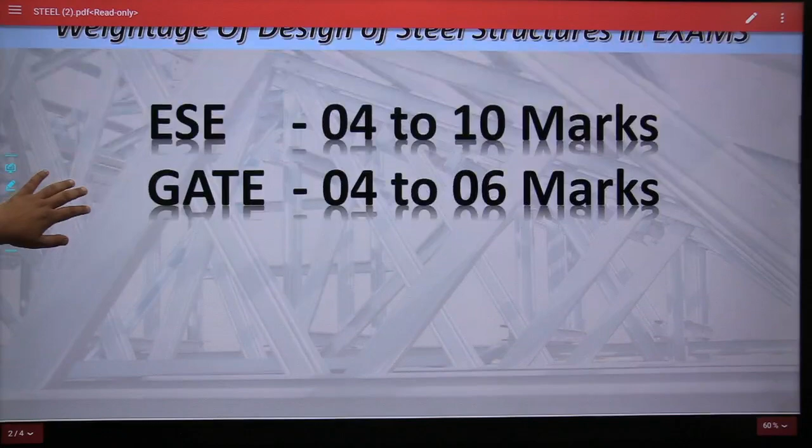Students, if we talk about the weightage of steel structures - on average, in previous year examinations, 4 to 10 marks questions were asked from steel structures in ESE, that is Engineering Services Examination, whereas in GATE examination, on average 4 to 6 marks questions were asked from this subject. So I ensure you that in your upcoming examinations you will see 2 to 3 marks questions definitely from steel structures.

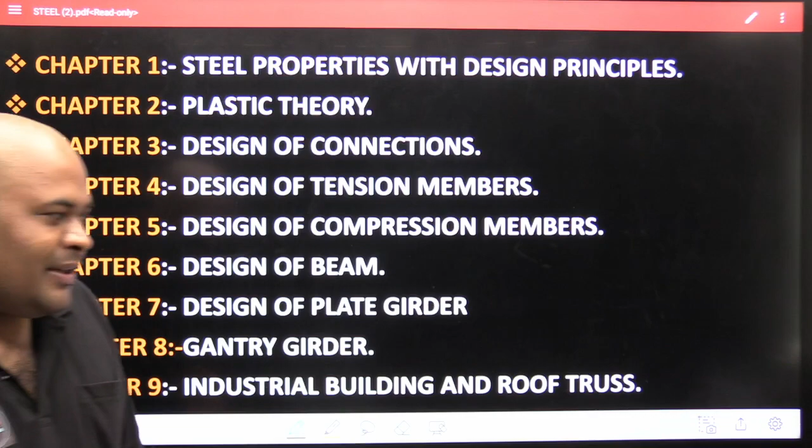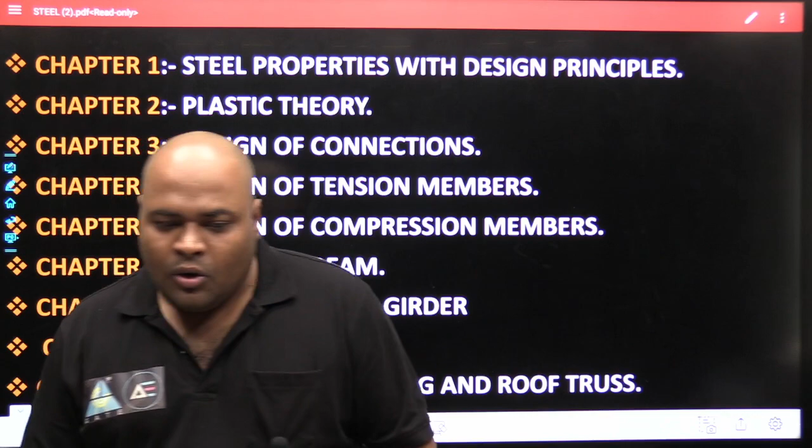Now it's time to understand, to see, to feel what chapters we are going to discuss in this subject. So students, I have divided this subject into 9 important chapters, as you see here. The first one is steel properties and design principles. The second is plastic theory, then connections, then tension members, then compression, then beams, then plate girders, then gantry girders, and in last, industrial buildings and roof trusses. These are the 9 chapters which we are going to discuss in these courses.

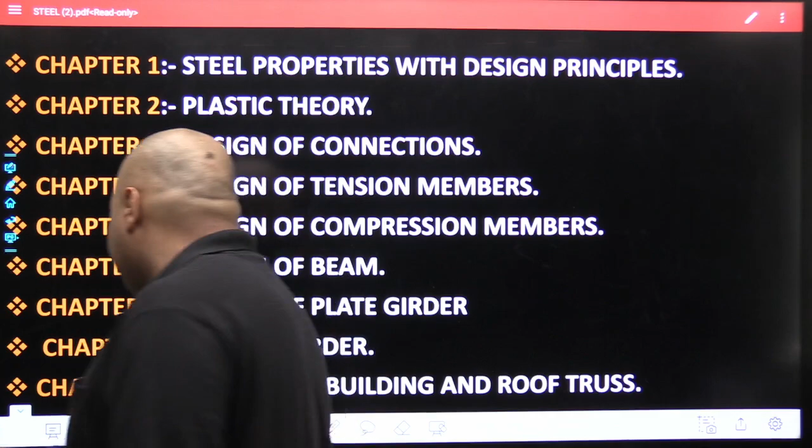Now let's see the subtopics of these chapters, what we are going to discuss in each individual chapter. Let's see that. If you talk about the first chapter, that is basics - steel properties and design principles. This is your first chapter, students.

In this chapter, first of all, we will discuss the basics of mechanics and strength of material. As you know, steel structures is a subject of designing, and the concepts of SOM and mechanics will be used in the further topics of this subject. So a good knowledge of mechanics and SOM is very much essential for the upcoming chapters of steel structures. So what I have done, I have taken 2 or 3 classes in which we will discuss only the basic concepts of strength of material and engineering mechanics, so that you become comfortable with these concepts.

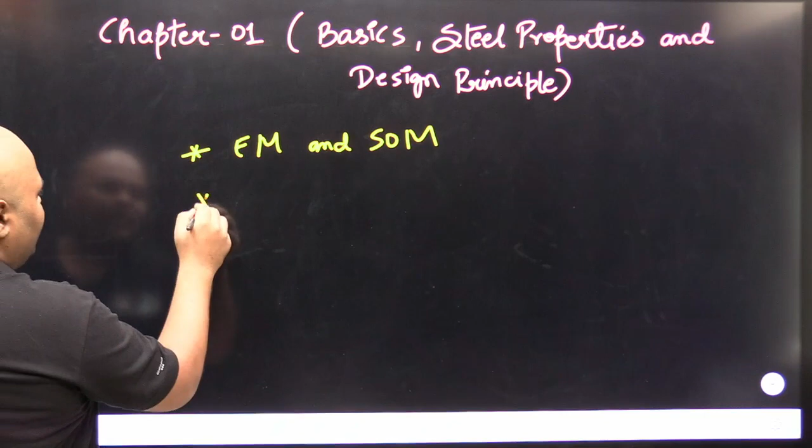So in the basics, we will deal with the concepts of engineering mechanics and strength of material. After that, students, we will discuss the structural steel properties, like what?

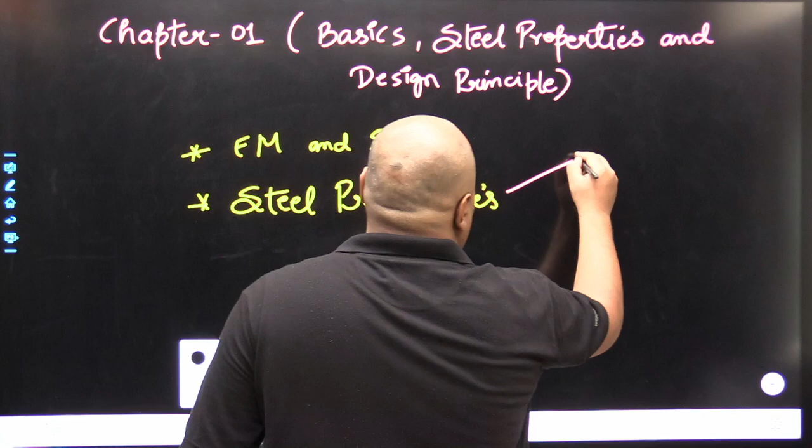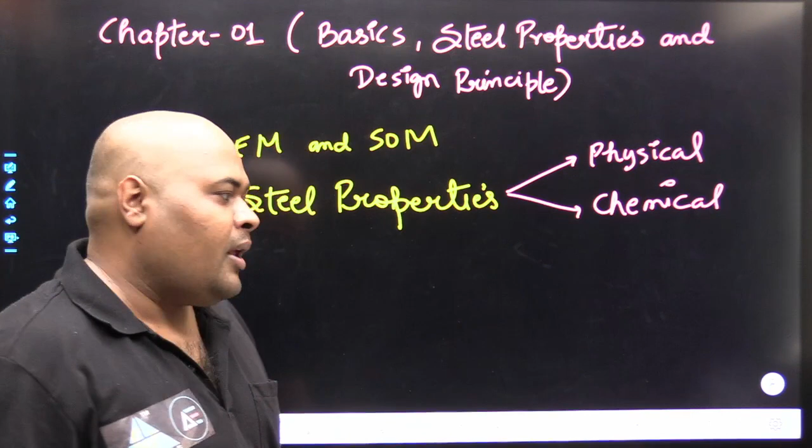Like physical properties of steel, chemical properties of steel - what is the chemical composition of good steel - and at last, the mechanical properties of steel. So in steel properties, we will discuss these 3 properties: physical, chemical and mechanical properties of steel sections.

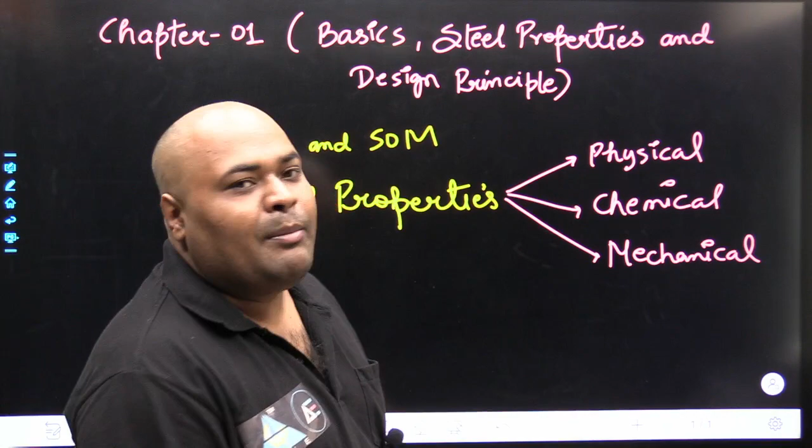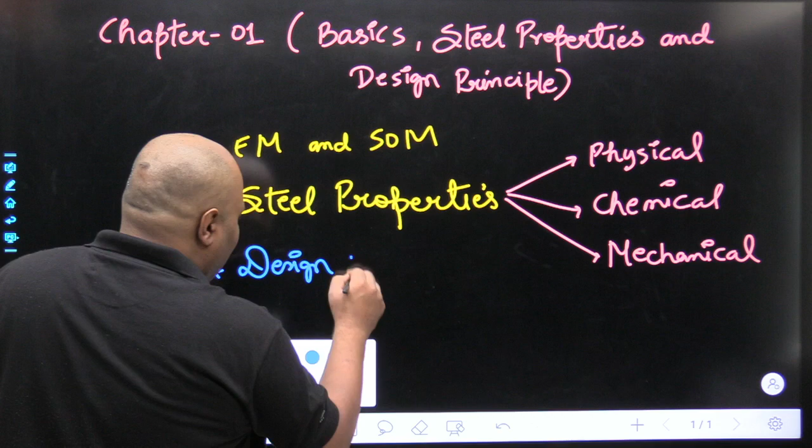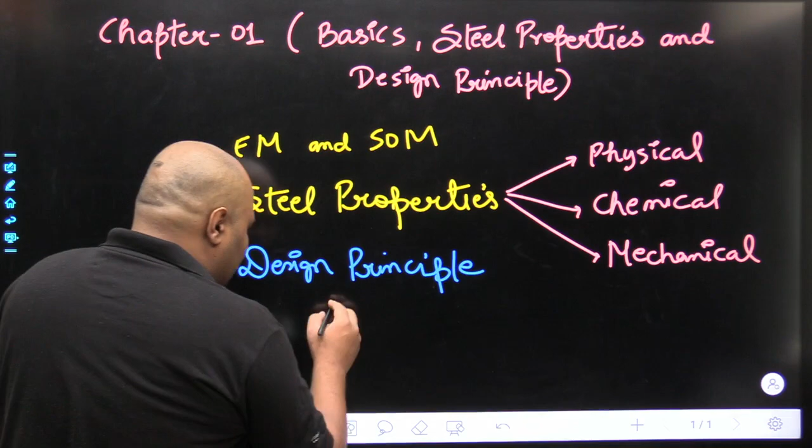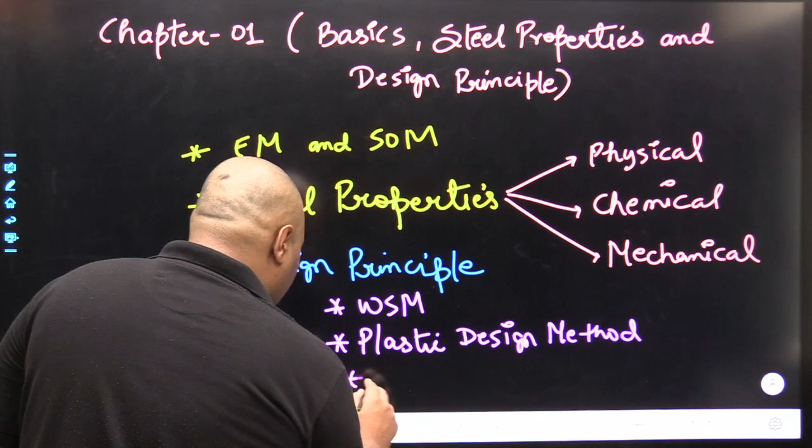Okay guys, and at the last, and very important, the design principles. We will discuss these in the last of chapter first. In design principle, students, we will discuss the 3 basic methods of steel structures: WSM, working stress method, the plastic design method, and at the last, your limit state method.

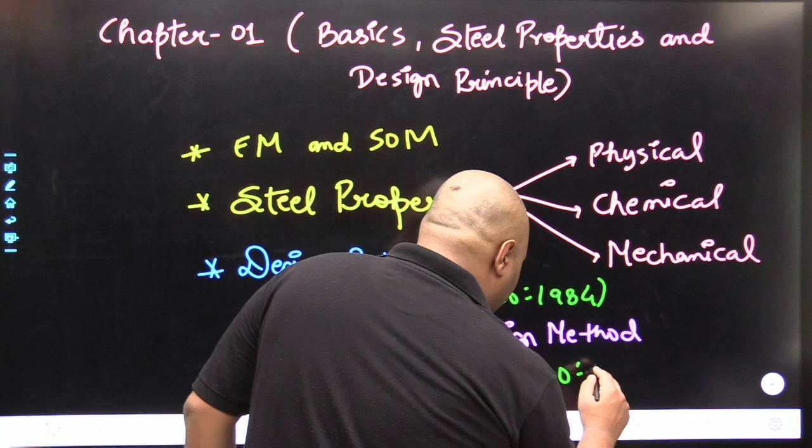Students, if you talk about the working stress method, then you need to follow IS 800 1984, and if you talk about the limit state method, then you need to follow IS 800 2007. These are the Indian standard codes for working stress method and limit state method. So by the use of these three methods, we will design the steel sections.

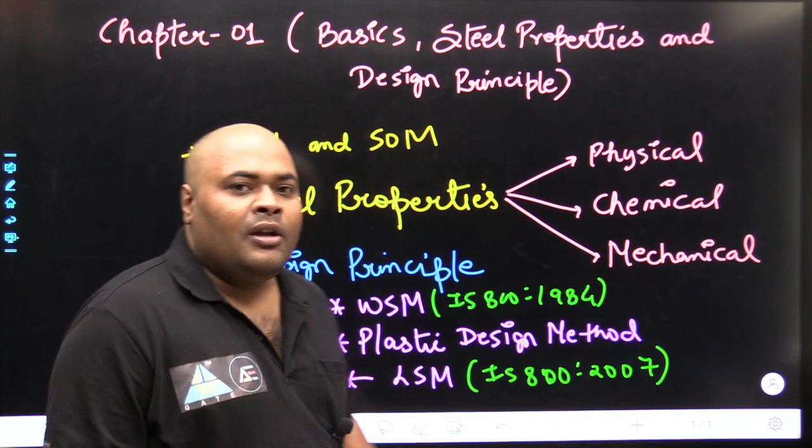Okay, so this is the introduction part of chapter 1. After finishing chapter 1, we will discuss chapter 2, that is your very important chapter named as plastic theory. Students, in strength of material or in engineering mechanics, you have done your analysis up to elastic limit only.

Up to elastic limit only. But in plastic theory, we will design the structure, we will use the property of steel sections after the elastic limit, up to the plastic point. So this chapter will tell you how the structure behaves after elastic limit.

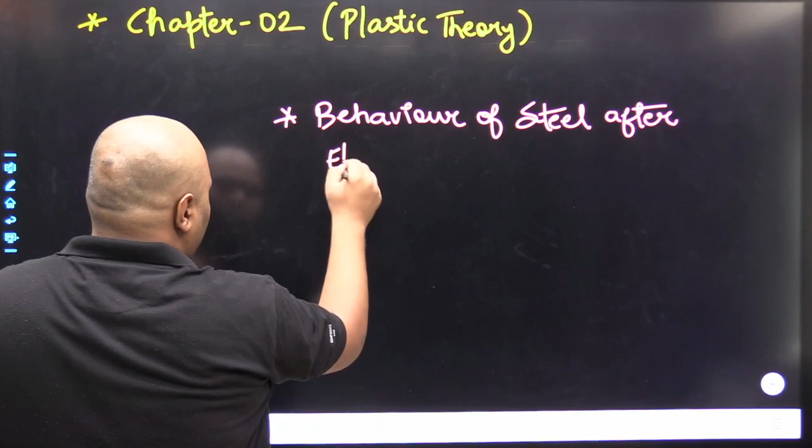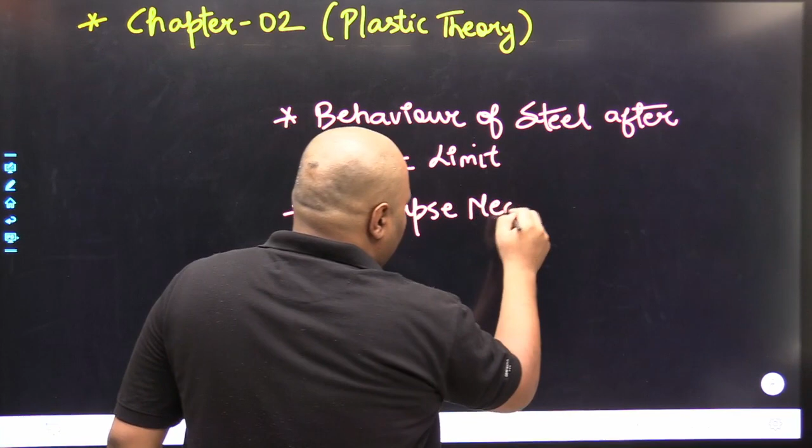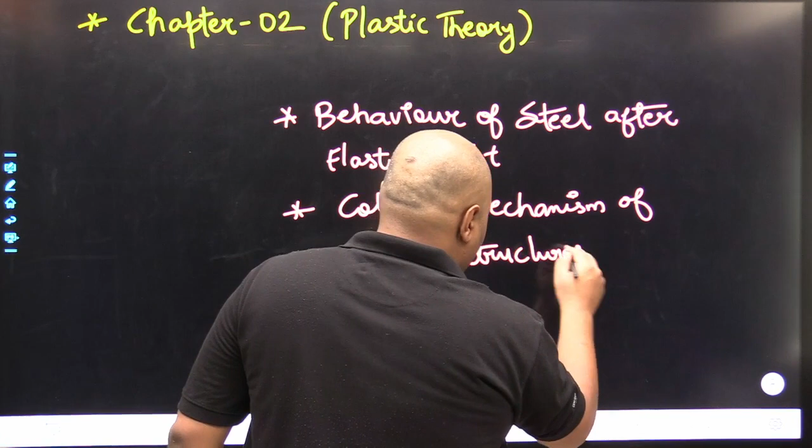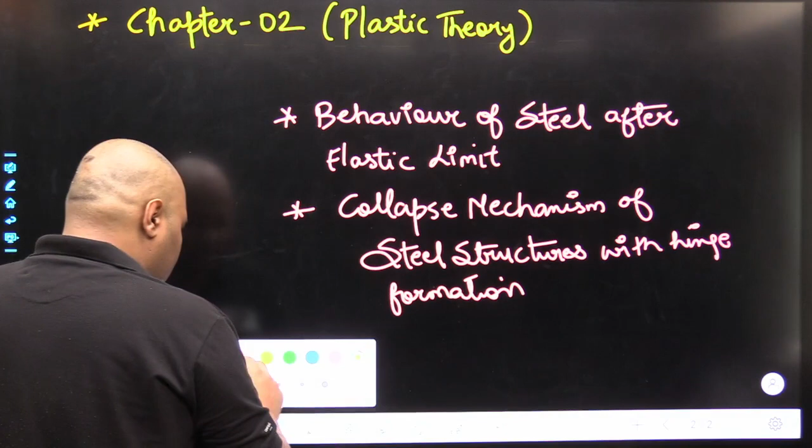So in this chapter we will discuss the behavior of steel after elastic limit. We will also discuss the collapse mechanism of steel structures with hinge formation, and of course we will discuss a very important factor, that is your shape factor.

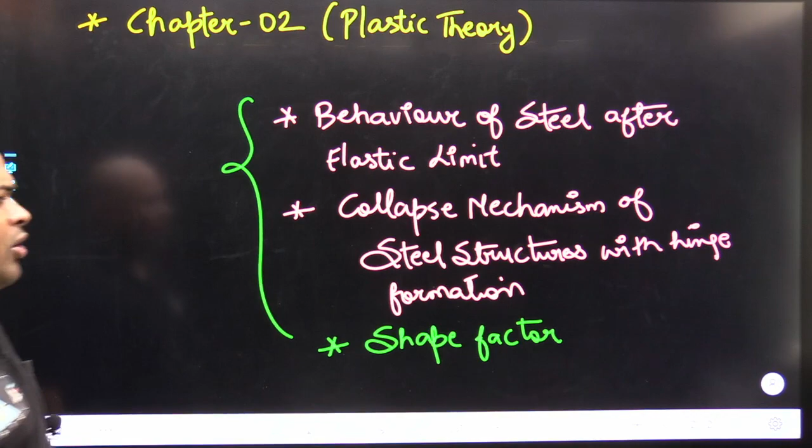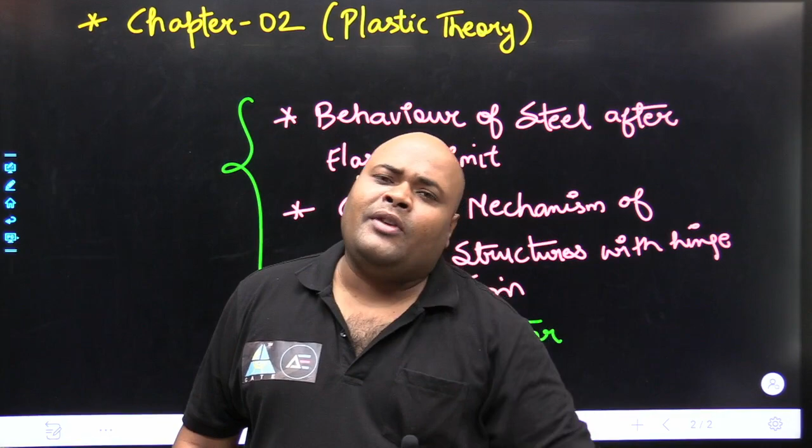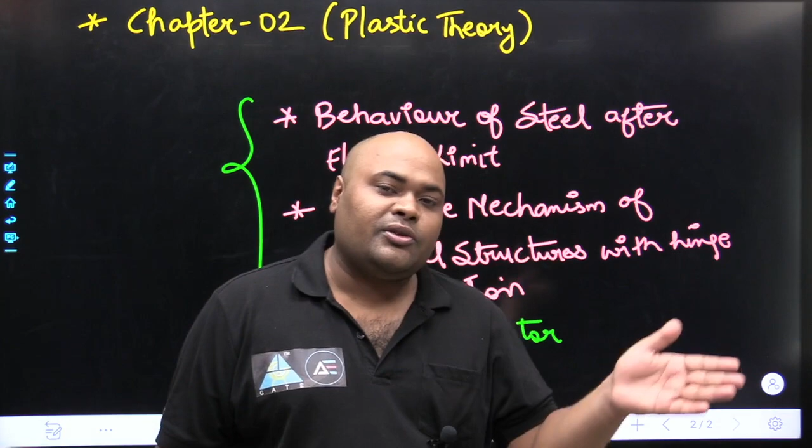So basically these are the three basic or important points which we will cover in chapter 2. Besides this, many topics are there. So in chapter 2, basically what we will do, we will see the behavior of steel sections after elastic limit, how the steel sections behave after elastic limit in plastic zone. When a steel section enters the plastic zone, then how it behaves - we will see these concepts in chapter 2, that is plastic theory.

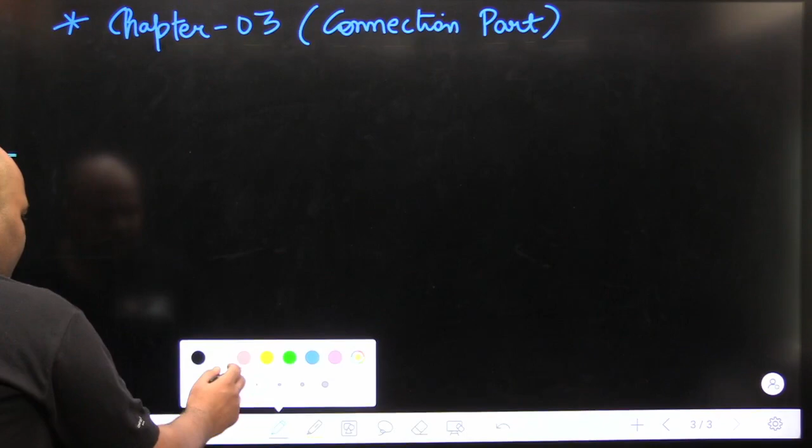After discussing chapter 2, that is your plastic theory, we will discuss the very important chapter of steel structures, that is chapter number 3, that is your connection part. Students, after discussing all these chapters, I will tell you the importance of individual chapters as per ESE or GATE point of view, so please watch the video up to the last. So in chapter 3, we will discuss the connection part.

What is connection? First of all, I want to tell you what is connection. So see students, in my hand, you are able to see that, I hope so. Basically, let us assume these two plates - I am not going to say this is a gusset plate because you are not aware of this subject - so let us assume these two plates are connected like this.

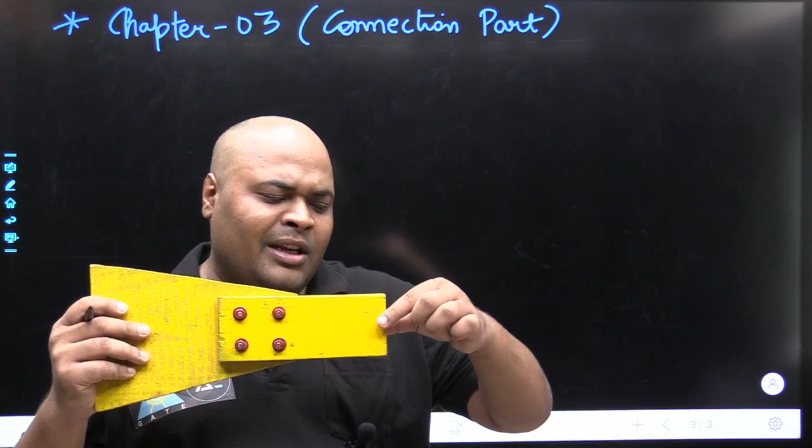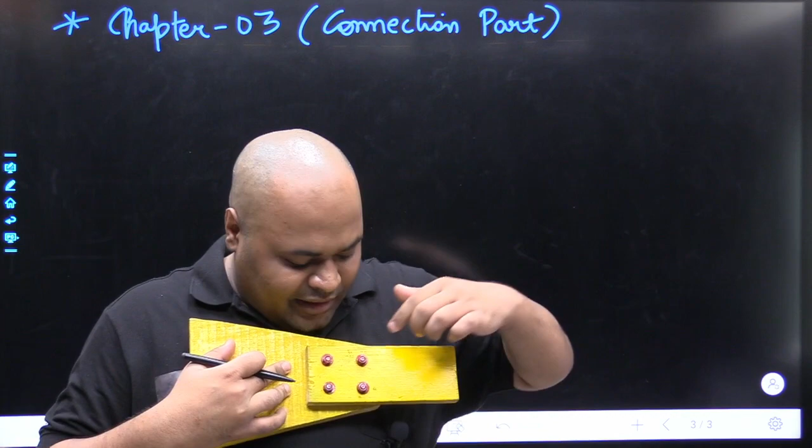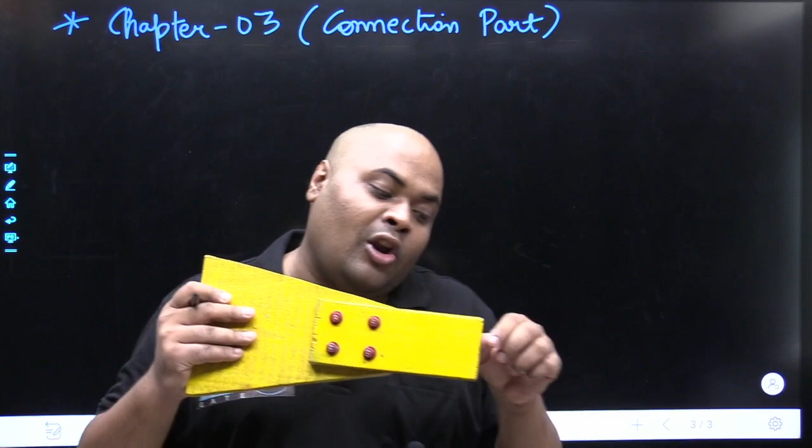And if I am applying a force, an axial force in this direction to this plate, then what you are seeing here, these two plates are connected with these 4 bolts. So the force I am applying here is resisted by these 4 bolts. Got it guys? So this is the connection between these two plates. These two plates are connected by the 4 bolts, and the load I am applying here is resisted by these 4 bolts. So in the whole connection part, we are going to discuss only the strength of connection.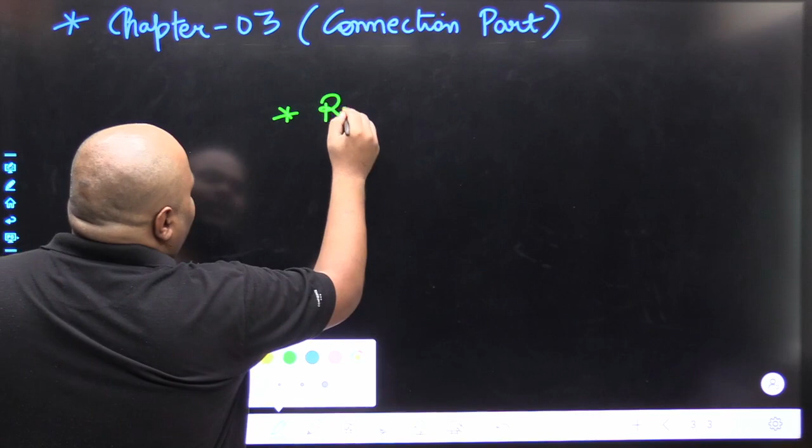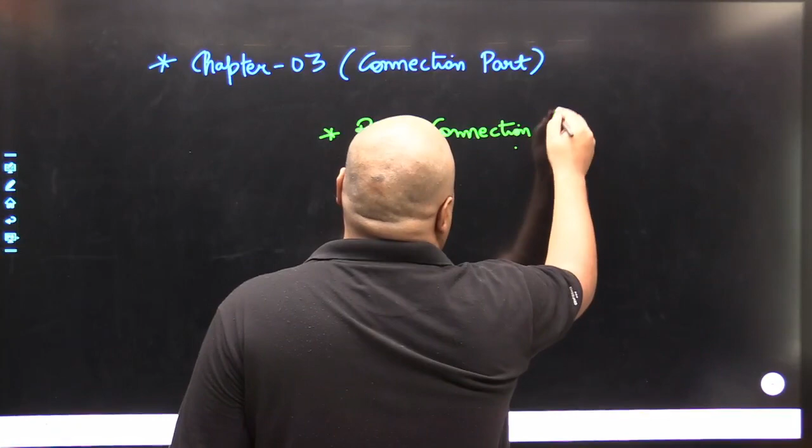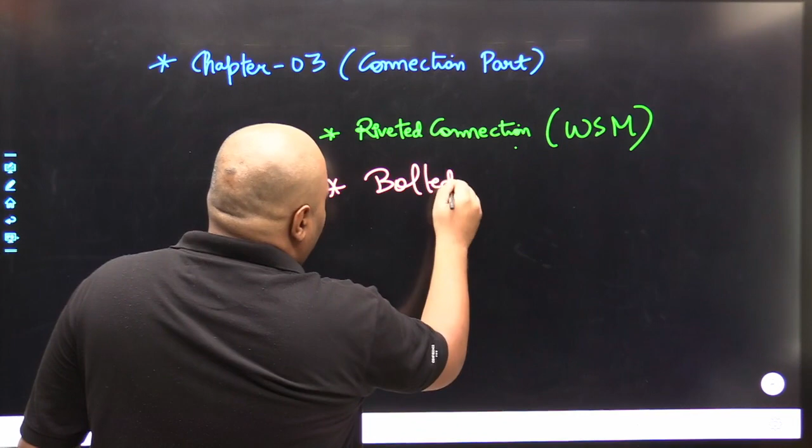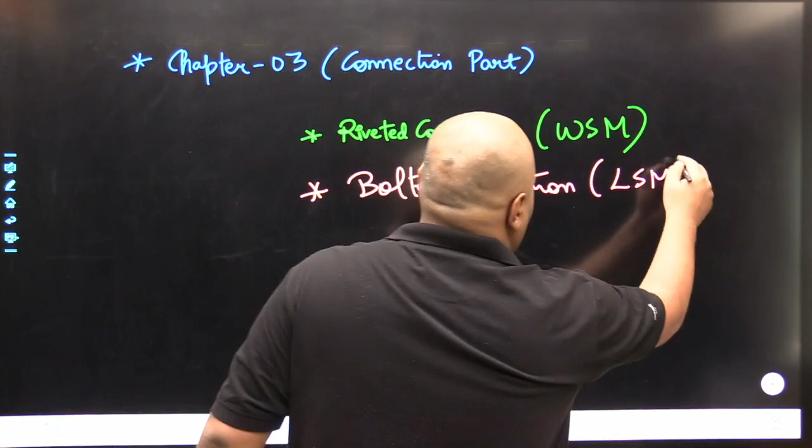In connection parts, guys, we will discuss first the riveted connection, which is designed as per the principle of working stress method. After the riveted connection, students, we will design the bolted connection part, which is designed by the principles of limit state method. And after the bolted part, we will discuss the very important welded connection - it is also designed by limit state method.

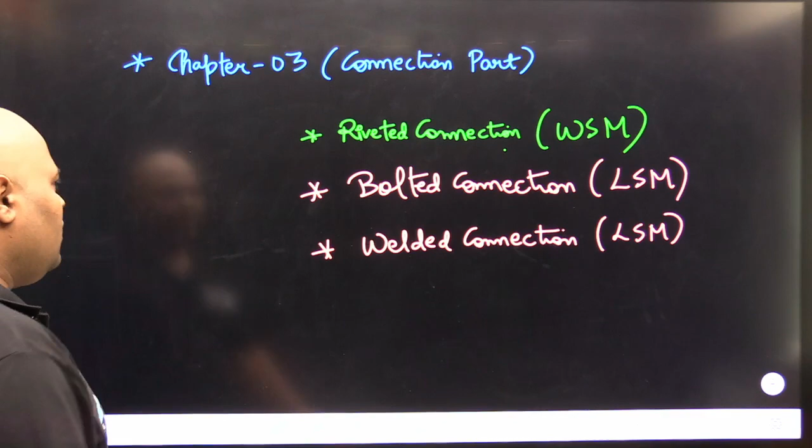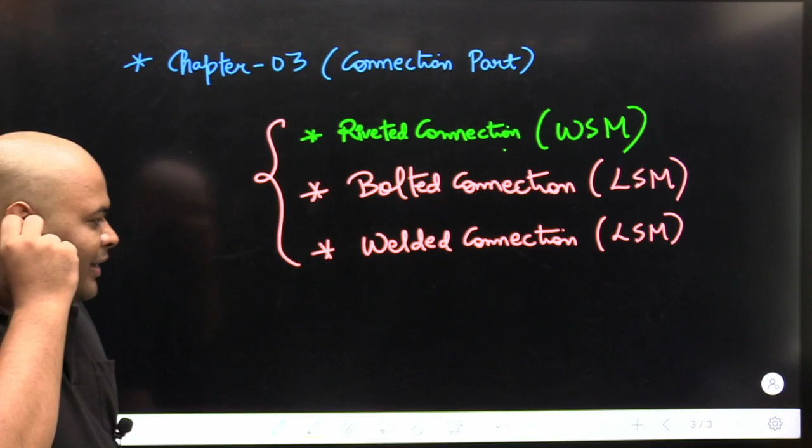Okay guys, so these are the three types of connections used in steel structures to join any two members or more than two members. Got it guys? So in the connection part, we will discuss these three topics.

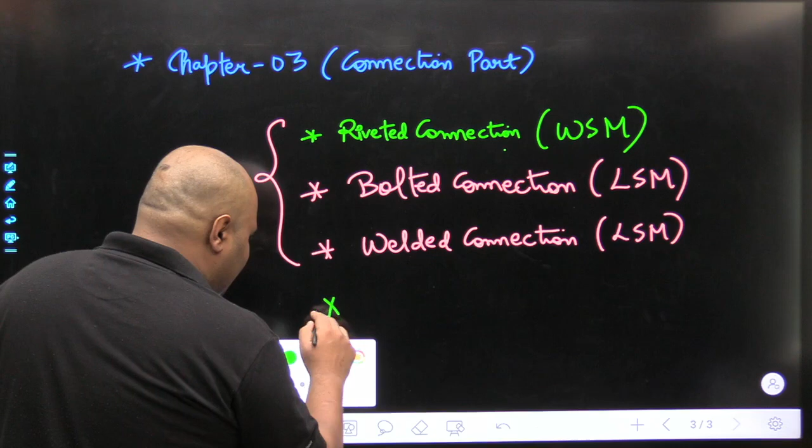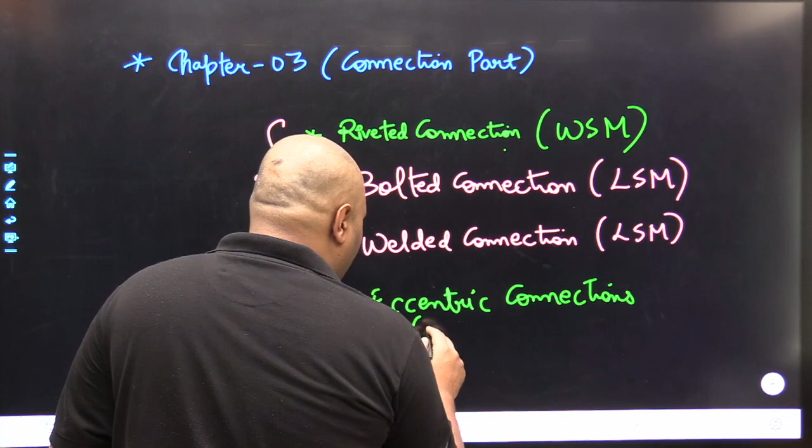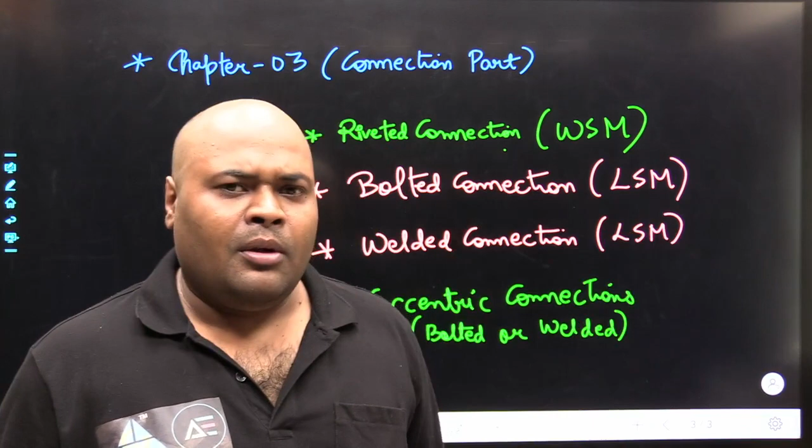Beyond these three topics, a very important topic is still here, that is your eccentric connections. And these eccentric connections may be from bolted or welded - we can form eccentric connections by the use of bolted as well as welded. So this is the very important topic of the connection part, that is your eccentric connections. Got it guys? I hope it is clear to all of you.

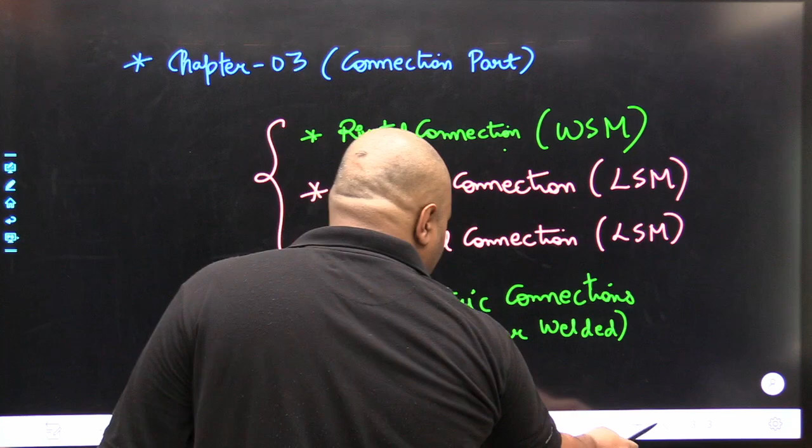Now moving to the next chapter, that is chapter number 4, that is your design of tension member.

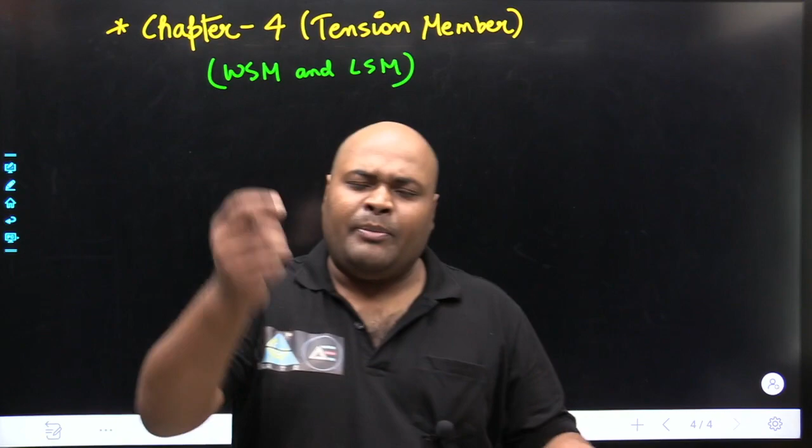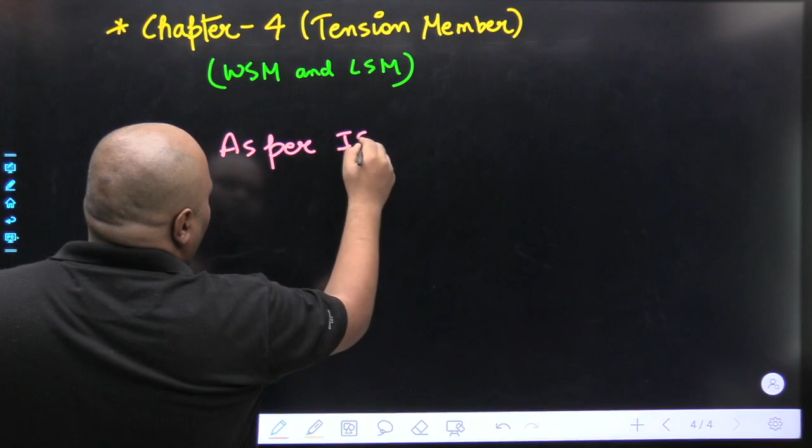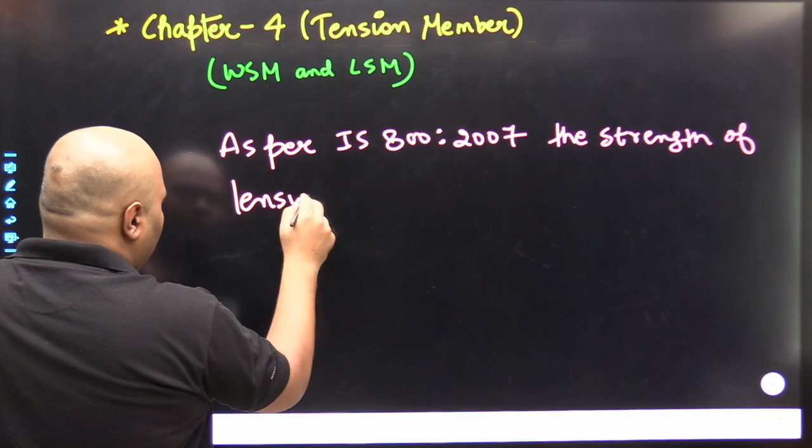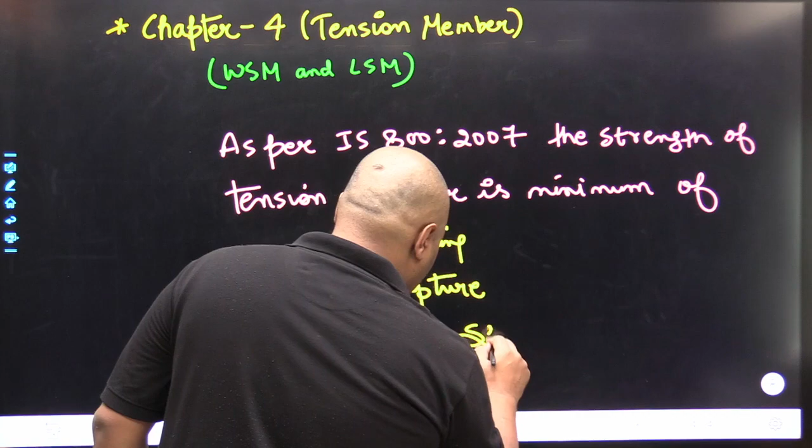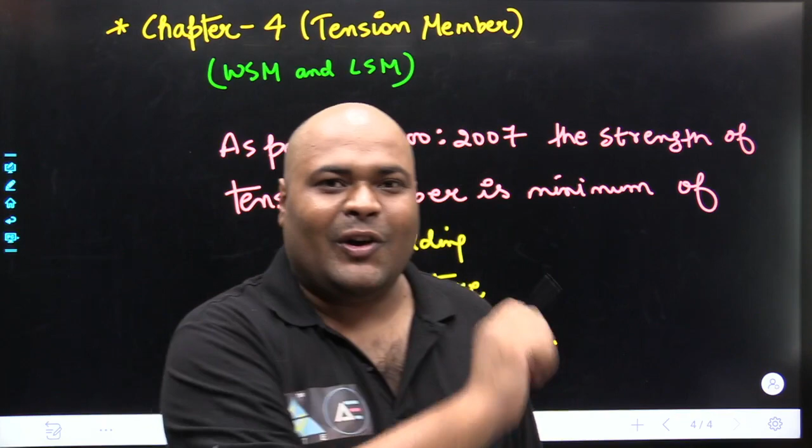In tension member, we will discuss the design principles. As per Indian Standard Code IS 800 2007, the strength of tension member is minimum of yielding, rupture and block shear. The basic principle in tension member is to calculate the tensile capacity, the tensile strength of steel sections.

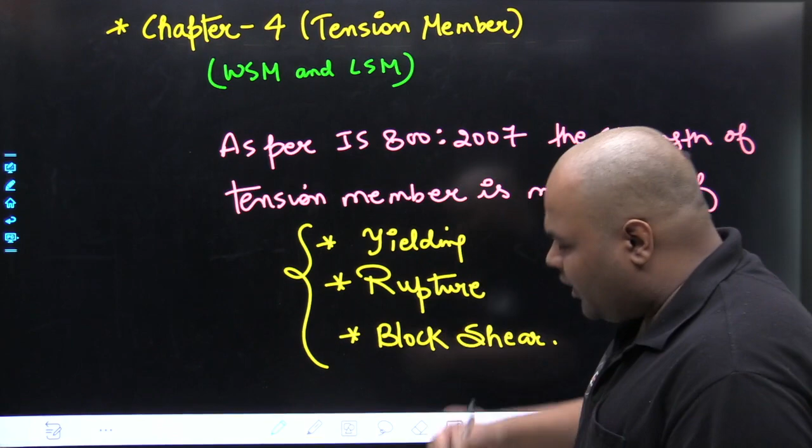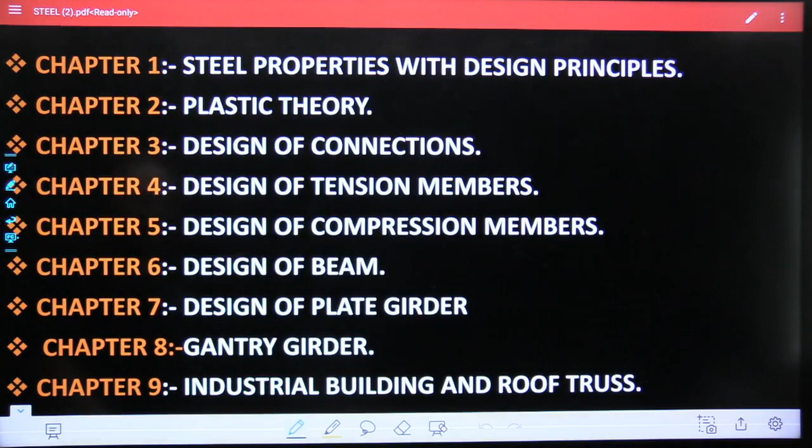What is yielding, what is rupture, what is block shear, we will see in our courses. So after completing chapter 4, we will start chapter number 5, that is your design of compression member.

These are the compression members. In these compression members, we will design... So after tension member, we will start chapter number 5, that is design of compression member.

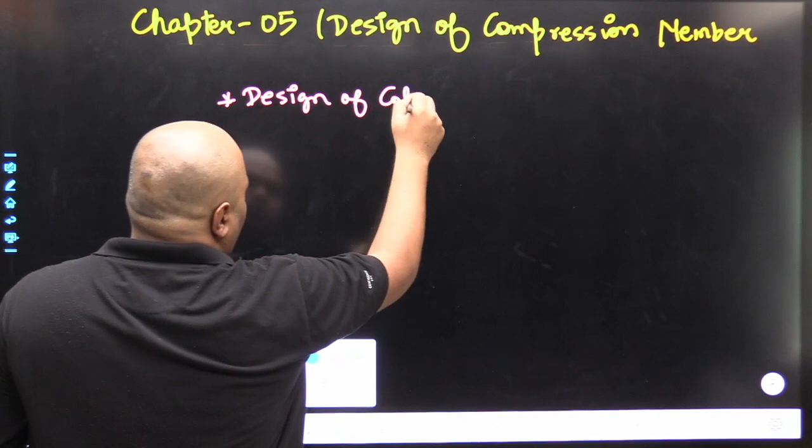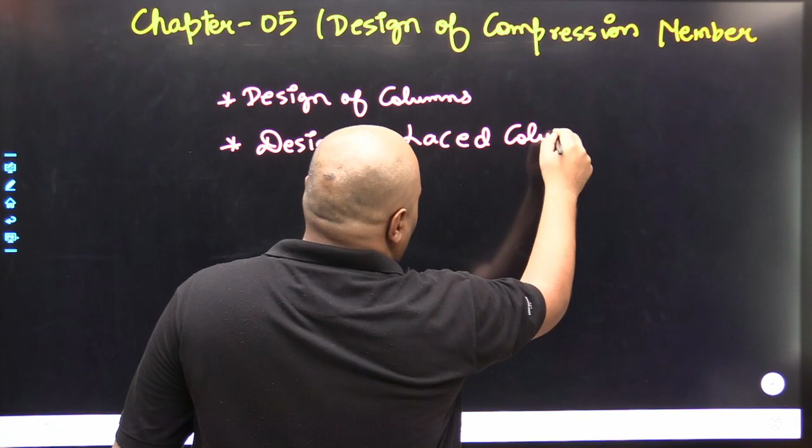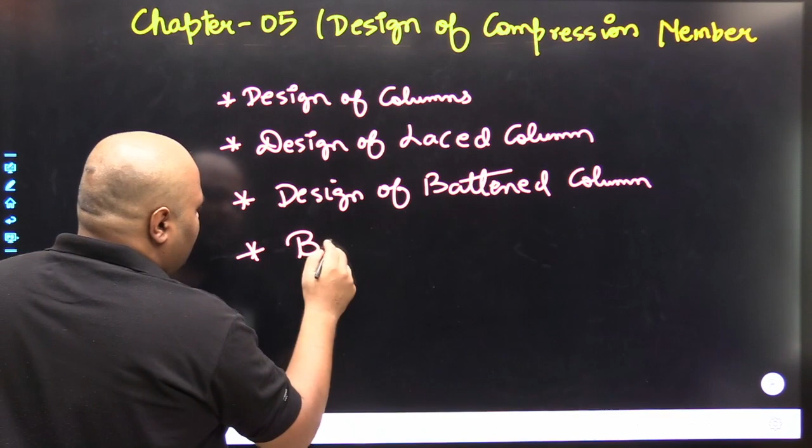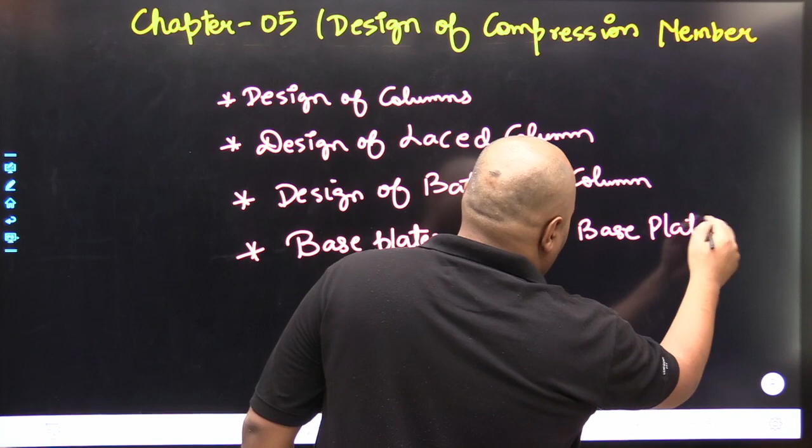In compression member, we will discuss the design of columns, we will discuss the design of laced column, we will also discuss the design of battened column, and at the last we will design the base plates, the gusset base plate. These are the topics, the subtopics, which we will cover in the design of compression member part.

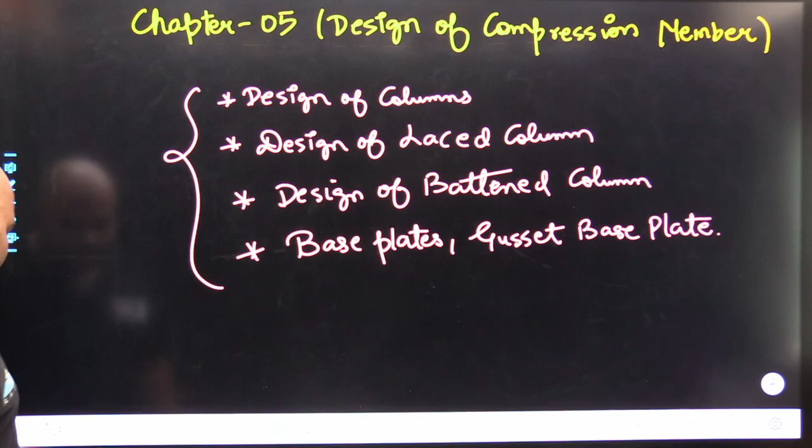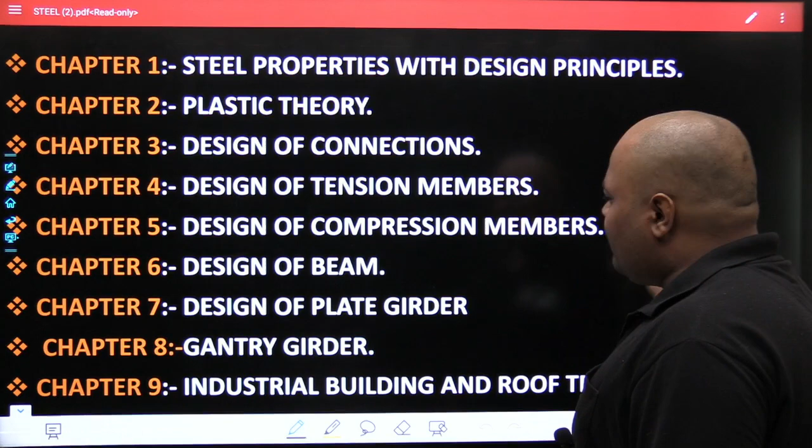After completing chapter 5, in chapter 6 we will design the beam part. In beam part, beam will be subjected to high shear, low shear, which we will discuss in our syllabus. Then we will discuss design of plate girder, then gantry girder, then industrial building and roof trusses.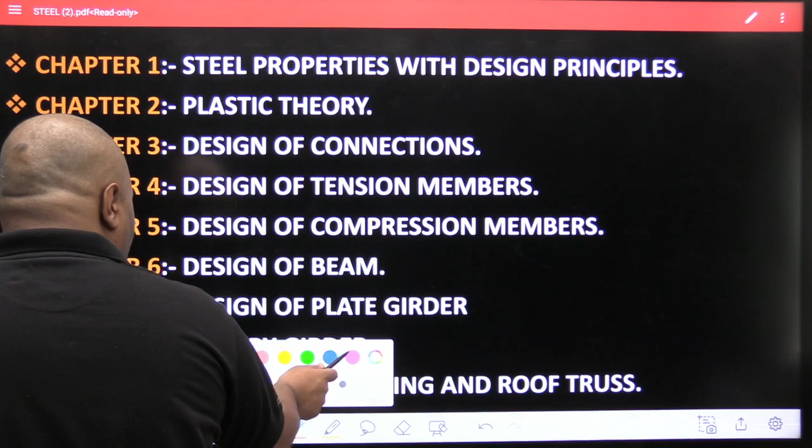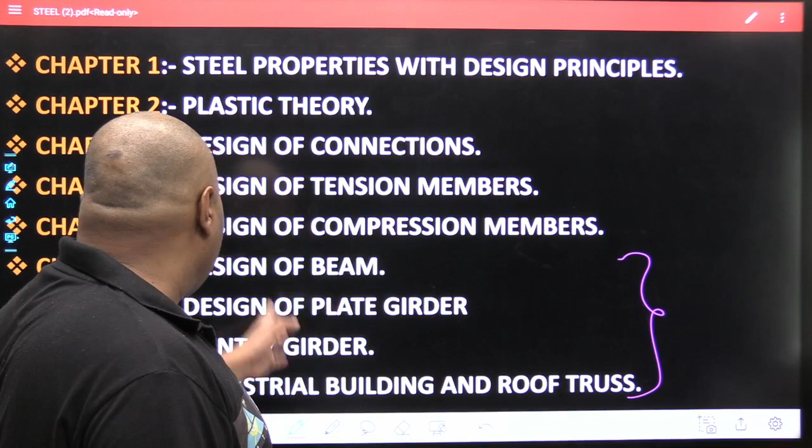There is no need to elaborate the subtopics of these chapters because it is not relatable in this video. You will see the content and quality of the topics which I am going to cover in these courses only in my classes.

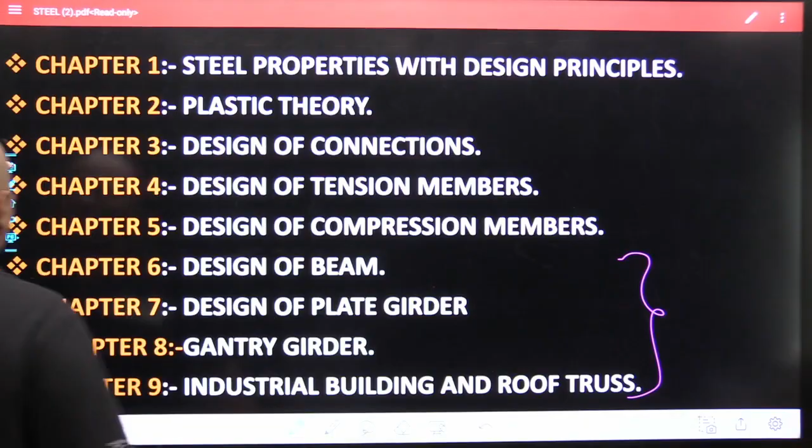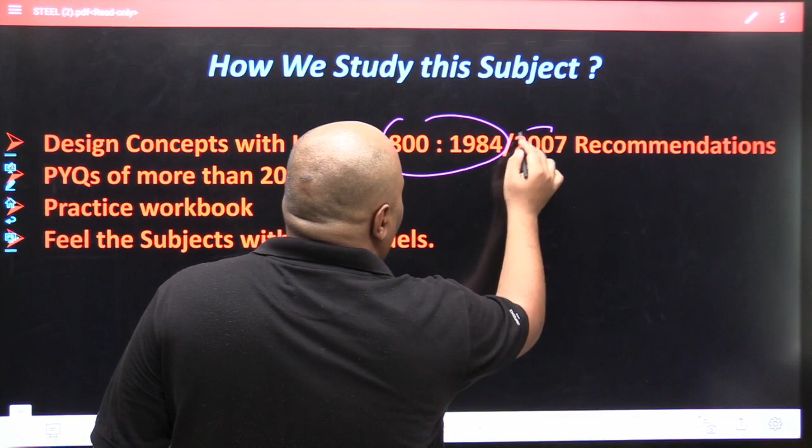So the main question arises, what will be our strategy while completing these chapters? What I have designed for you: first we will learn all concepts, all codal provisions with respect to IS 800/1984 and 800/2007. I personally believe you should know how to use the Indian Standard Codes.

In my classes, I have mentioned the page numbers as well as the clause numbers. And where the formulas are written in the code, what are the statements of the code, I have quoted all these things in my classes.

After discussing the concept with IS code, we will solve PYQs of more than 20 years. PYQs represent previous year questions of ESE and GATE. We have solved, or are going to solve, questions of more than 20 years of ESE as well as GATE.

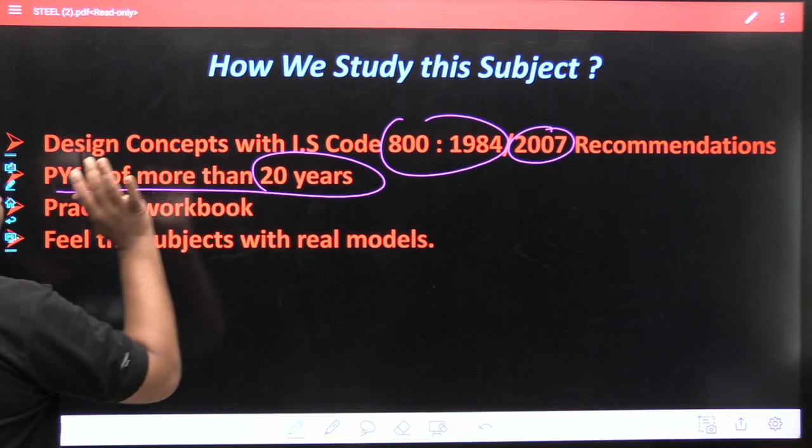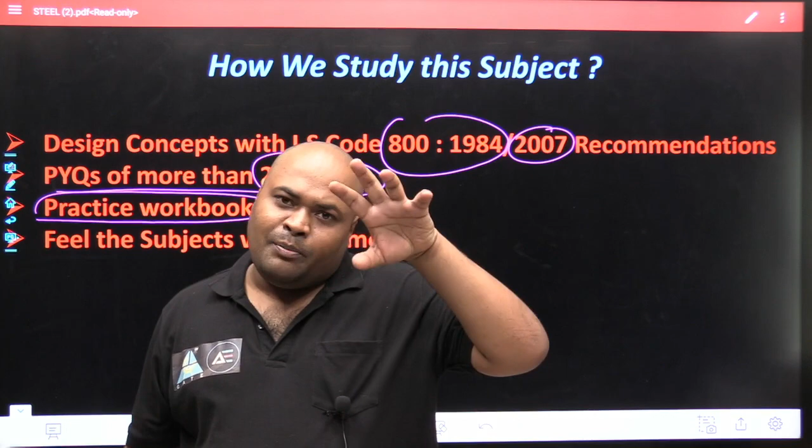After this, we will also solve our practice workbook, which includes the conclusion of my experience of 9 years, what I think are the questions that will be asked in your future GATE examinations. I have made a practice workbook that is also going to be solved in our courses.

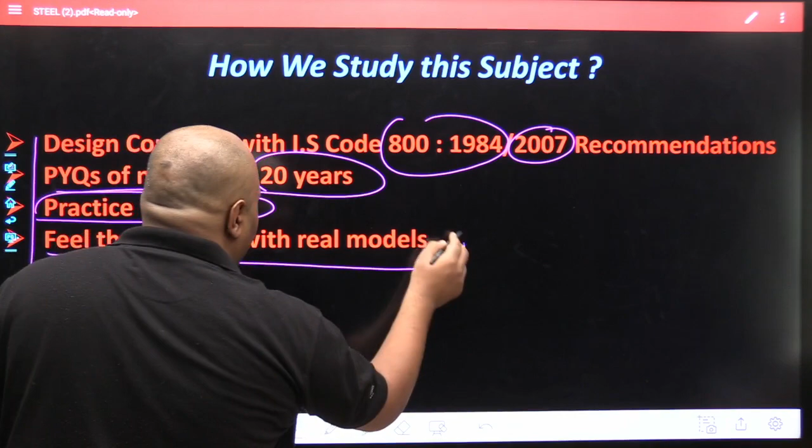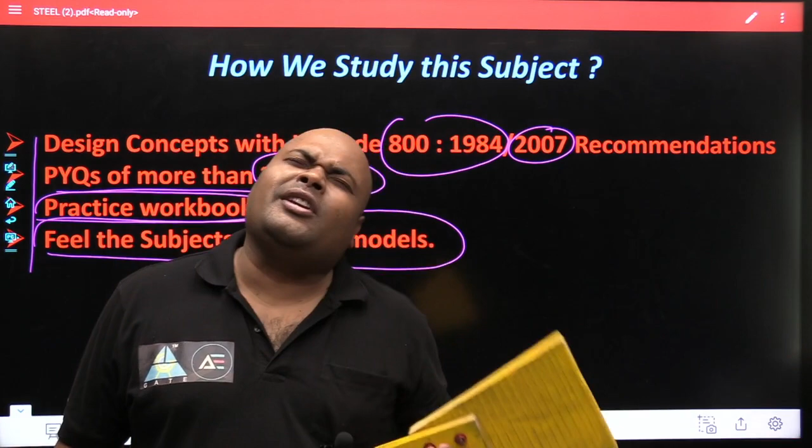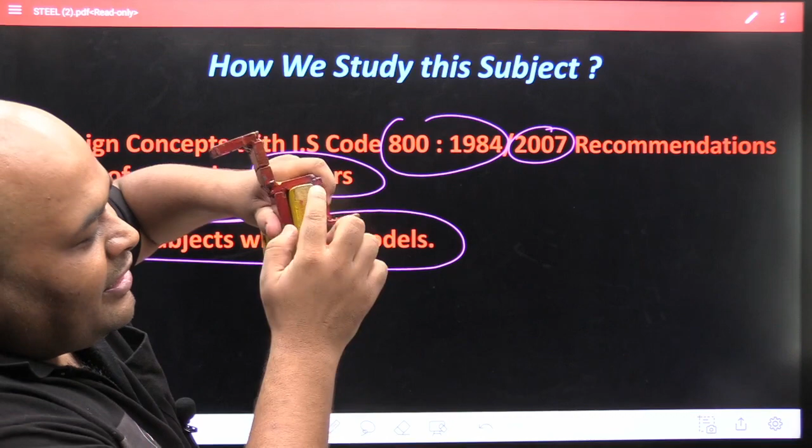At the last, the practical feel of the subject is compulsory and necessary. If I say a gusset plate is connected with an angle section, you have to imagine how it looks. But if I elaborate with a real model showing the gusset plate connected with the angle sections, it is quite easy to understand. So during my lectures, I will generate the practical feel of the subject through real models.

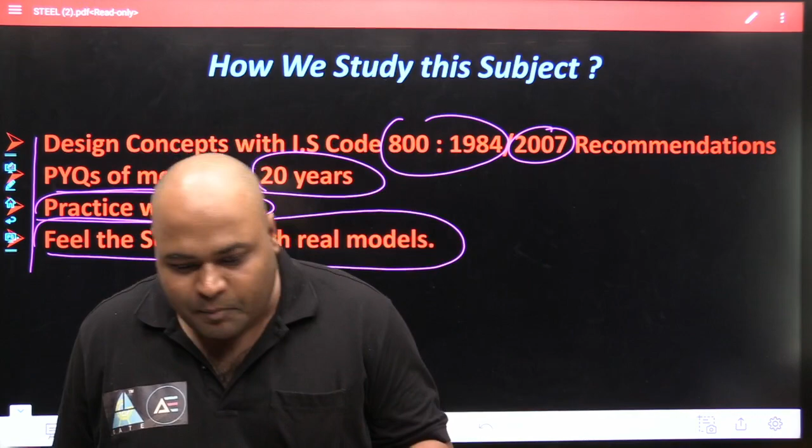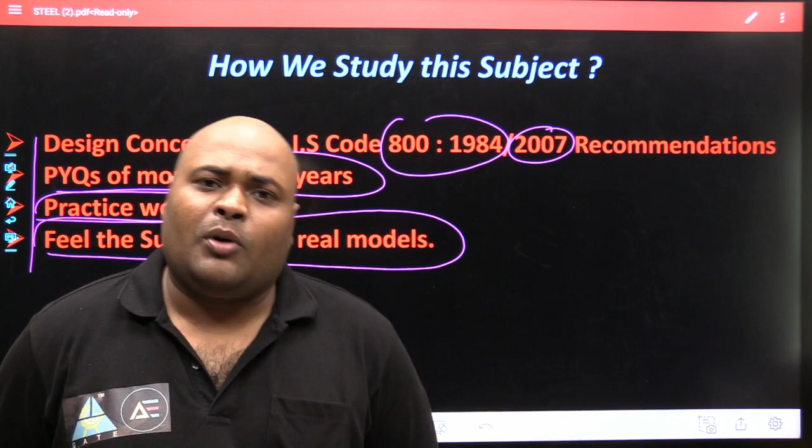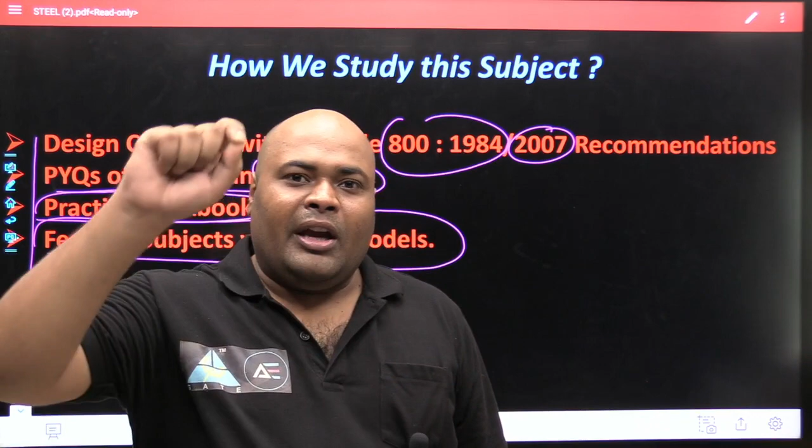So this is what I wanted to explain about the design of steel structures which I am going to take in these courses. At the last, I think it's never late to start. So take these courses as soon as possible and enjoy the learning of steel structure, enjoy the learning of GATE examination with GATE Academy, and secure your best AIR in your upcoming GATE examination. Thank you.